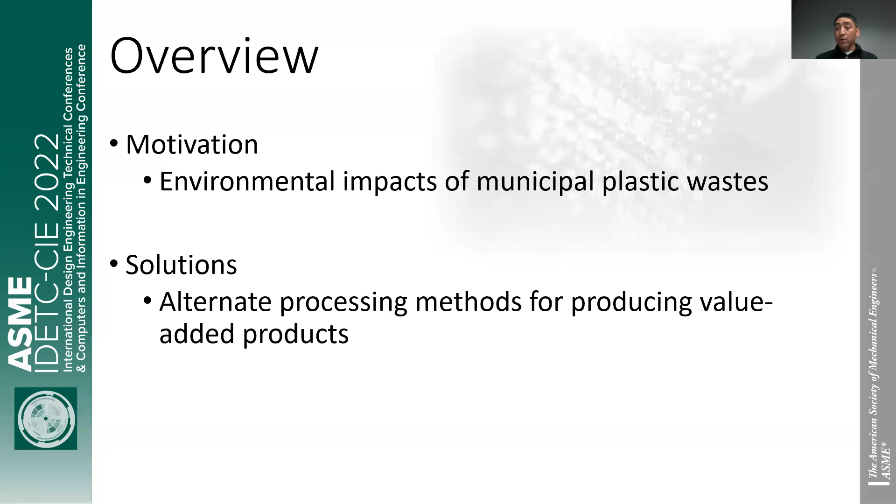I want to start with a little overview of this project, which basically is to identify environmental release barriers and impacts for the municipal plastic waste that everybody produces every single day. And the solution that could actually release some pressure on the environment is basically to process the plastic waste into new value-added products such as oil and char for asphalt and other construction products, in a specific and economic way that is effective for all the stakeholders.

This is a little bit of background. The municipal plastic waste that the U.S. produces, we produce about 380 million pounds. Here in Eastern Idaho, we produce approximately 645 million pounds of plastic waste. That is equivalent, according to the EPA, the Environmental Protection Agency, to 4.99 pounds per day per capita.

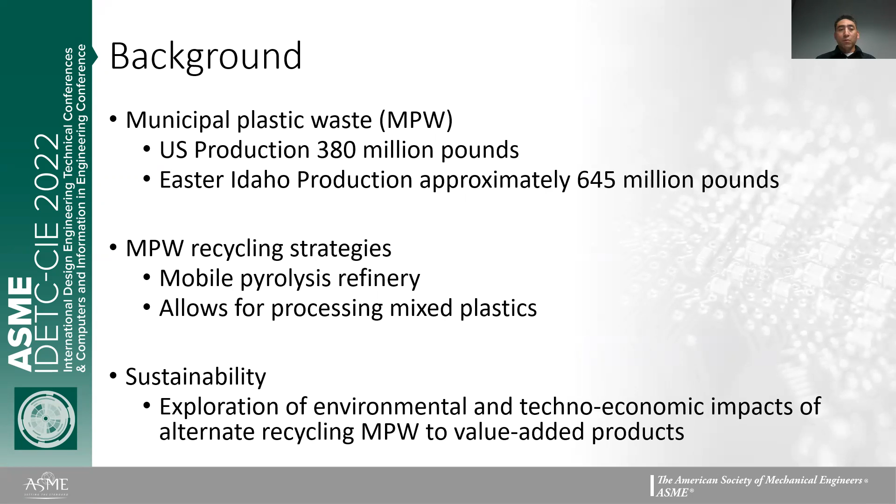And so the strategy to overcome this is basically a mobile pyrolysis refinery that allows us not just for the plastic to come to us, but actually to go to where the plastic is. And this will allow us to process different plastics, not just specific ones. And looking at the economics and sustainability, we're exploring the environmental and techno-economic impacts of alternative recycling of the MPW, or municipal plastic waste, into different products.

The life cycle assessment that we did was obviously the goal and scope. The goal was identifying and analyzing the GWP for 100 years, and also looking at the greenhouse emissions, where the system boundary was from grave to gate, basically after disposal, taking it to the refinery to come up with the different value-added products. And the scope has three different sectors: the upstream, midstream, and downstream sectors,

where the input would be the plastic and fuels and lubricants, the midstream process would be the size reduction, converting the plastic into oil and char, and the storage and transportation for upscaling the oil into different products. And the functional units that we use are kilograms of CO2 per 100 metric tons of MPW, and 1 gallon of oil.

For the life cycle inventory, we utilized the European reference life cycle database in OpenLCA, where this is the process for production of 1 gallon of oil, or P oil, and the OpenLCA and Ecoinvent LCIA method that we utilized. So basically this allows us to understand the environmental impacts and production process of the waste that is produced daily, determine the potential effects, and optimize the process through the system boundaries that we have put, as you can see here.

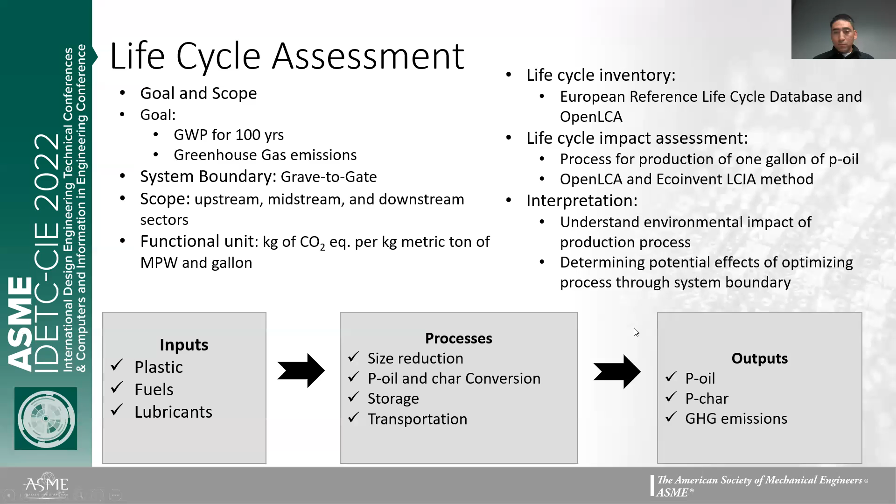As you can see here, this is our materials and methods. This is a basic boundary, and this is the sustainability assessment that we did, and we compared it to the current process. We also utilized computer modeling for the case study in southeast Idaho. In the process simulator, the refinery capacity is 50 metric tons per day, or 32,000 metric tons per year.

As you can see, we go from the collection to the pretreatment. This would also be a portable pretreatment where we reduce the size of the plastic. Then we have the refinery, and after the refinery we go to the storage for the char, and the tanker truck would be utilized to take the oil to an upgrading refinery.

And we also have the Idaho map here. As you can see, this is the metric tons of plastic that is created by county. As you can see, Bonneville and Bannock are the ones that produce the most plastic.

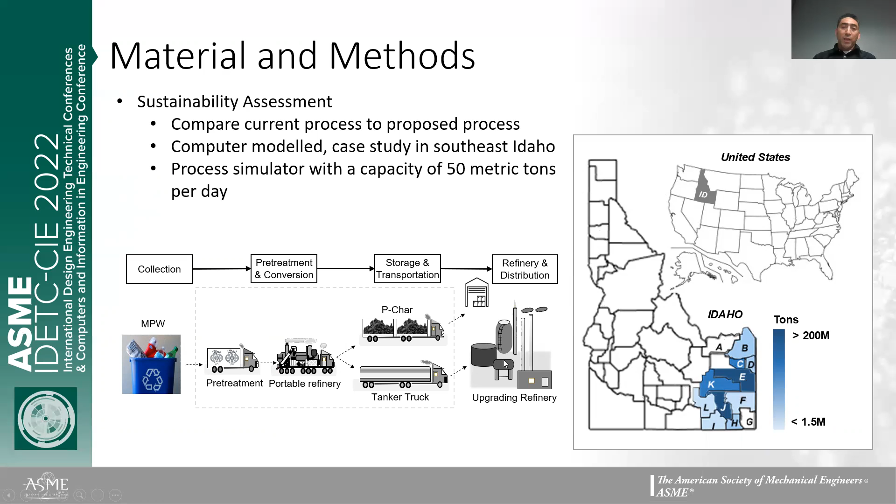And to understand the economics part of this project, we did a techno-economic analysis utilizing the TEA model, where we take into account the capital and operation costs of pretreatment, conversion, and storage and distribution of 2 mobile refineries. Once again, there's the 50-ton capacity of each refinery, with an annual schedule of 328 days and 12-hour production shifts per day.

And these are the processes: the grinding, which is the pretreatment, pyrolysis, the char, the different storages, and the transportation. As you can see, the capital cost will be about $1.2 million, and the operational cost, where we would see the most significant impact, would be almost $2.8 million, where the utilization rate per metric ton would be $1.2 million per year.

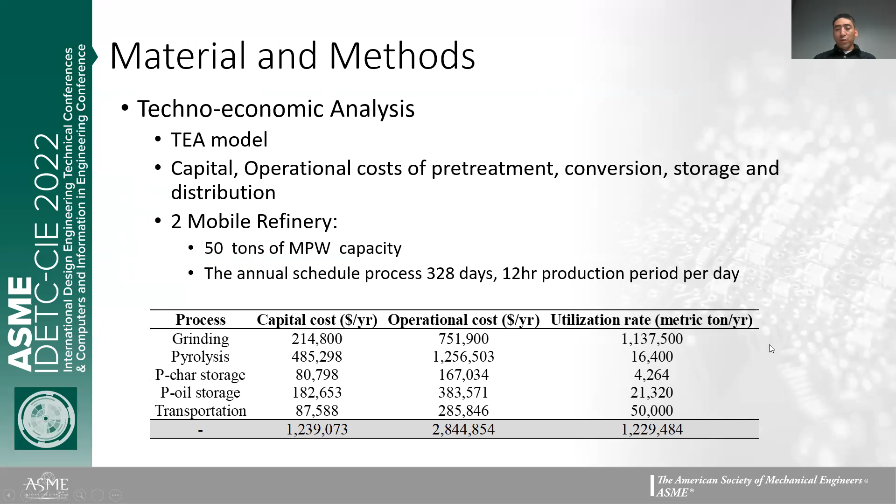And obviously for the municipal plastic waste, the results that we calculated are that we will be able to reduce emissions by 50% compared to landfill disposal with the current management. That basically results in about 1 billion of public benefits per year.

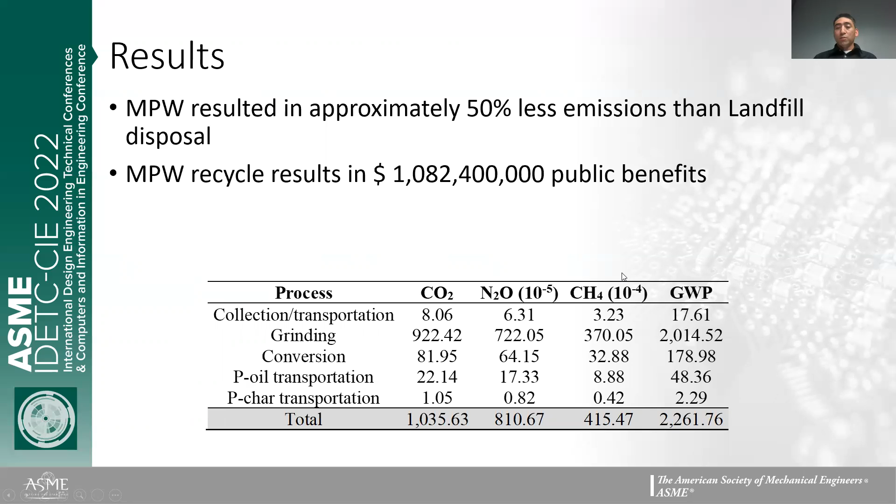And as you can see here, this is 2,261 kilograms of GWP that will be produced per 100 tons per day. So that is about 3 to 9 times less than just open field dumping, releasing all the plastic into the environment.

So, a little bit more in depth on the impacts of the amount of plastic available to utilize in a cost-effective way. Basically, we utilized the main case study, which once again is about 32,800 metric tons per year. We utilized different studies. As you can see, studies 3 and 4 look at the amount of plastic available to us and the oil production per gallon.

Obviously, it increases as we increase the amount of plastic processed. As you can see, the production cost per gallon is way less, so we can be financially stable as a refinery.

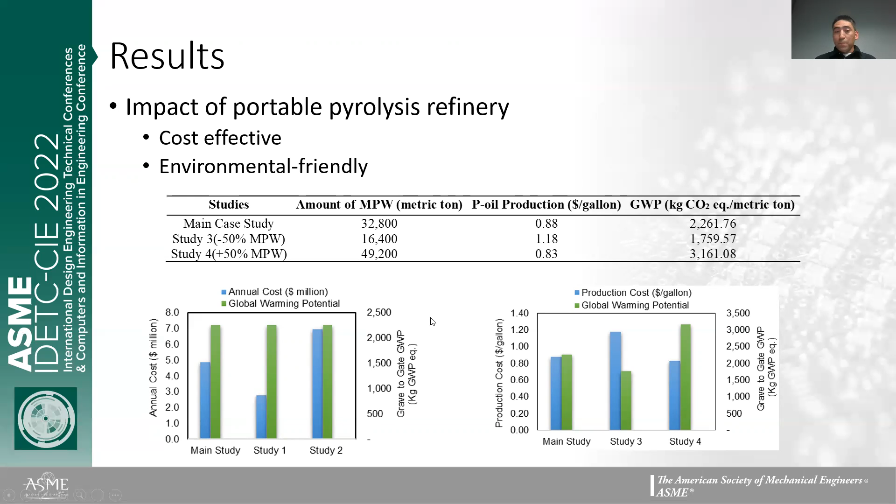But when it comes to the emissions, as you can see, by doubling the size, in this case 2 refineries instead of 1, it would be only 1,000 kilograms per metric ton more than the main case. Which is significant, once again, in a cost-effective way, and it's kind of like an economy of scale. The more you produce, the less it's going to cost.

In our conclusions, the environmental impact driver is the fuel consumption, about 90%, for the grinding, the pre-treatment, and also for the conversion, storage and distribution. That's where we see the most costs in our study. And as you can see, case studies generate 1,759 kilograms compared to ours, which would be about 2,261 kilograms of CO2 per 100 metric tons of municipal plastic waste.

And we believe that the MPW recycling process, the case study that we have done, has the potential to address plastic waste and recycling management. So once again, it releases a lot of environmental pressure on our lands and all our water systems.

The economic drivers will be the accessible amount of plastic that we have. As the community becomes more dense, more plastic will be available, and the more impact it's going to have. And also with the number of portable refineries that we utilize, the production cost is going to be less. So those are the main drivers.